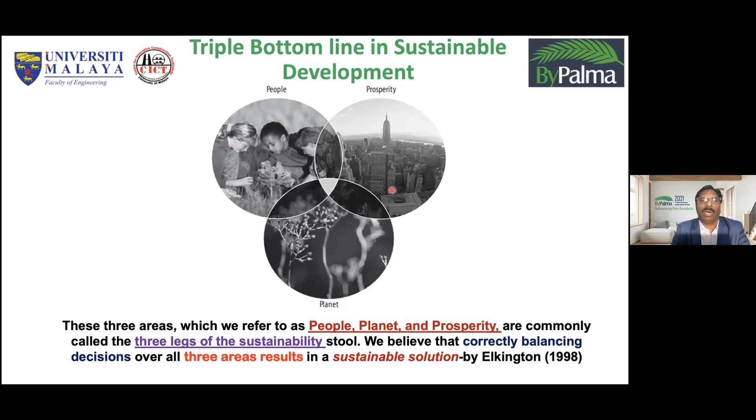But today, sometimes we look into the people but let down the planet, or focus on prosperity, and there will be consequences for the other two. One example: the United States consumes 30% of the total world's energy and 60% of electricity annually, for less than 5% of the world population.

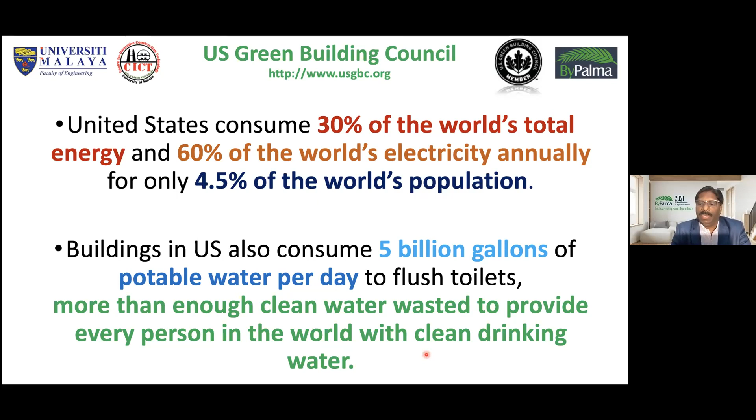Also, look at the water they use every day, potable water, to flush toilets in the US: 5 billion gallons. That water would be enough for every person in the world. I'm from a country, India, where we see many places with water scarcity. So one place has abundance or wastage, another place has difficulty getting basic needs.

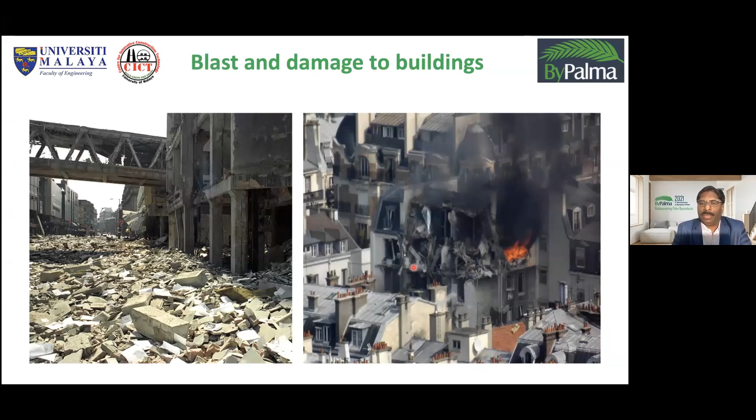Even if you look into the design, according to LEED certification, they normally consider energy saving, water efficiency, CO2 emission reduction, improved indoor environmental quality, and stewardship of resources and sensitivity to their impact. These are the metrics used in building certification for LEED.

If you don't know what LEED is, it's an acronym for Leadership in Energy and Environmental Design. In most Western countries, especially the US and Canada, they use this certification. In Malaysia, they use the Green Building Index.

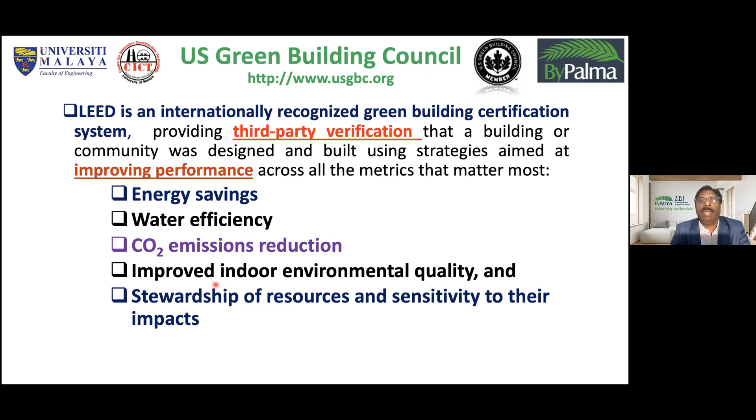So we see there is nothing to do with blast or any blast resistant structure here. Probably in future, they may consider certain structures that are subjected to blast or impact resistance.

Now let me go to the oil palm shell concrete. It's a biodegradable material available plenty in Indonesia, Malaysia, Nigeria, Ecuador, and other tropical countries. We developed this oil palm shell concrete, calling it lightweight because the density is less than 2,000 kilogram per cubic meter. We studied its mechanical and structural behaviors, then went on to test for its blast resistant properties.

In Malaysia, millions of hectares, probably 18% of the land, are under cultivation of palm oil plantation. You can go everywhere and see it. This information is given on the Malaysian Palm Oil Council website, I won't go through it line by line.

They started in 1870, and today it's over 5.9 million hectares, or 18% of the total land as I mentioned. They produce 19 million tons of palm oil plus 2.2 million tons of palm kernel oil.

The oil palm can grow up to 60 feet, with a lifespan of about 100 years or even more. But normally they cultivate it for only 25 to 30 years, then replant it due to domestic, commercial, and economic reasons.

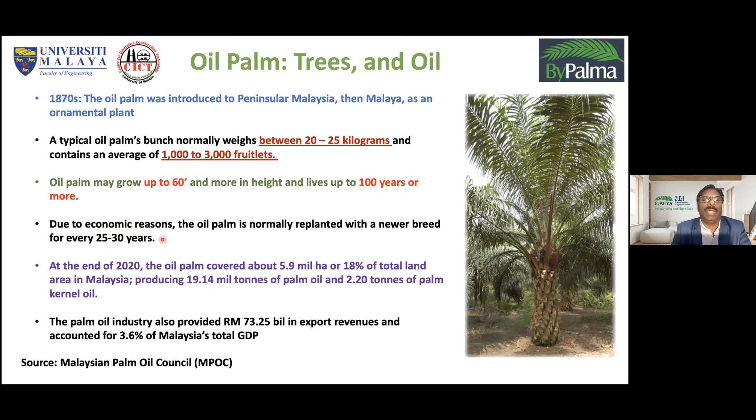Looking into the fruit bunches, after extracting the palm oil, each bunch probably has 1,000 to 3,000 fruitlets and may weigh 20 to 25, say 25 kg per fruit bunch. Each fruit bunch has, say, average 2,000 fruitlets. After extracting, they sterilize first, then extract the palm oil.

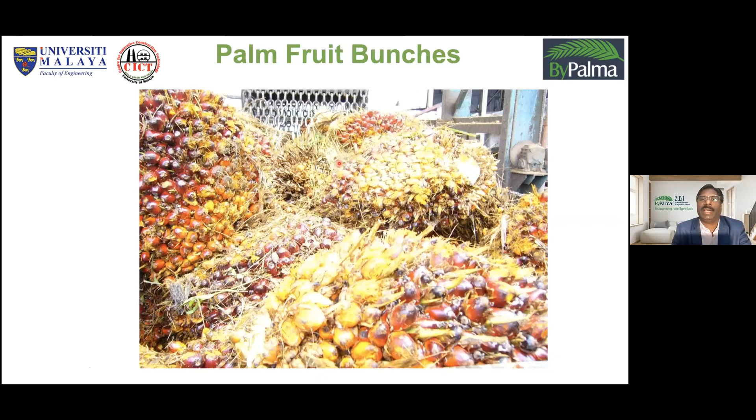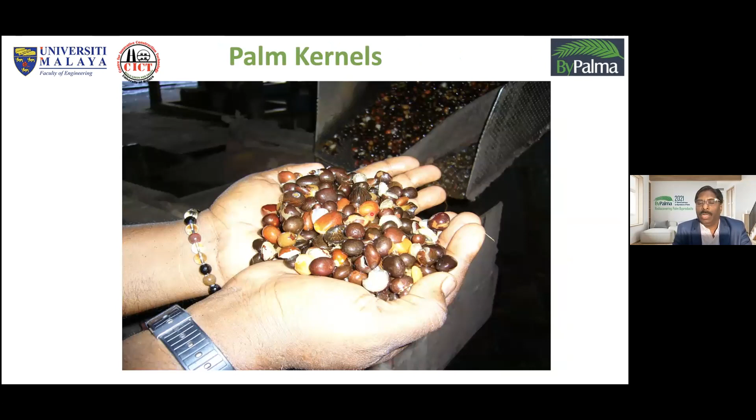This is the squeezing of the fruit. What you see in the palm of the hand is the palm kernel, encompassing the kernel inside. This is the shell here, and this is the kernel. They extract the kernel to get another oil called kernel oil.

So if you see here, it's very easy - most of you know this, but some who come to this meeting may not be aware. This is the kernel.

This is the palm fruit, fleshy, from which they extract the palm oil, cooking oil. And this is the shell we are talking about, called oil palm shell, brownish in color.

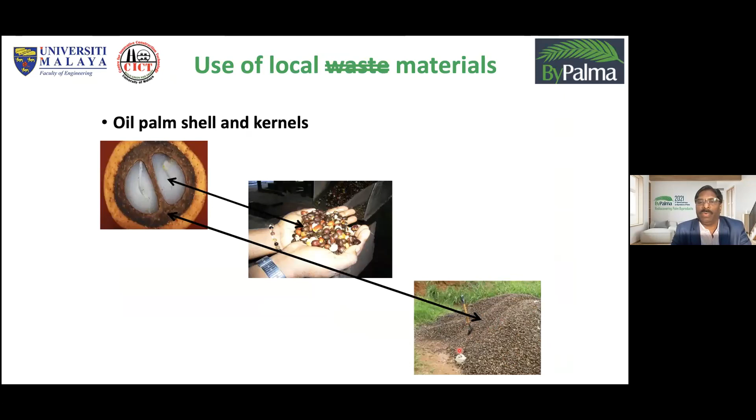Thirty years back, Professor Abang Ali from UPM was the pioneer in Malaysia who started this work. I pay respect to him. He's one of the pioneers, and nobody did this work except him in the beginning, in the 1980s. So when he started, it was considered novel. Afterwards, many including me and my students took up this work on oil palm shell.

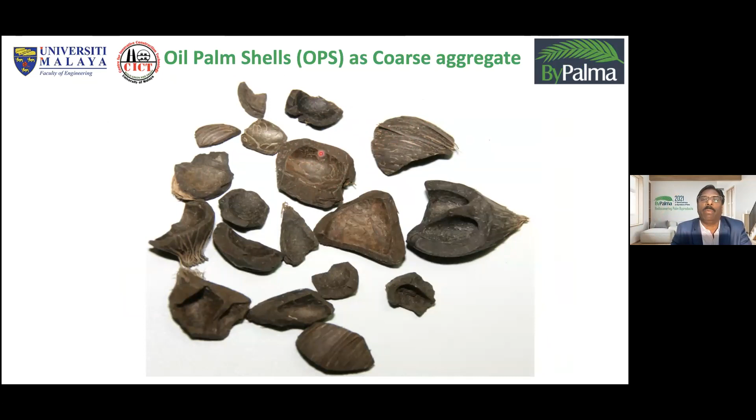So we have gone ahead to do something on blast resistance capacity. If you look here, we see that the shells have different shapes, convex, concave, and broken surfaces, and their thickness varies depending on the species.

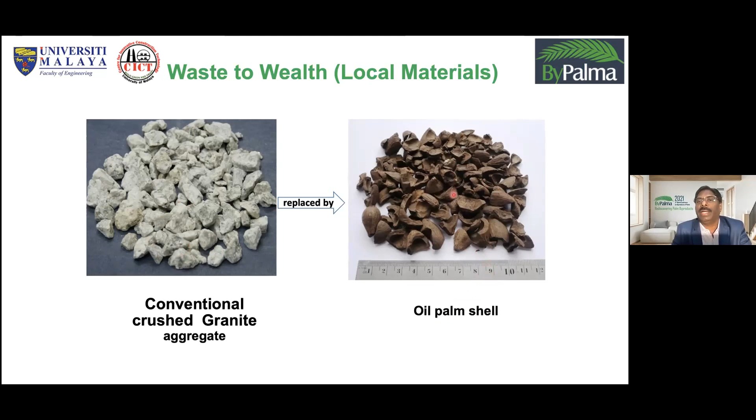We tried two types of concrete. One is the conventional crushed granite aggregate concrete, and the other is the oil palm shell concrete. So two types of concrete we cast using these two materials, and you see that they are quite contrasting.

If you look at the density, it's 1,500, here less than half of the crushed granite. And the thickness, we can get crushed granite at any desired size, probably 20 or 40 mm, whereas here the thickness is 0.7 to 3 mm, but the sizes can vary up to 12 or 14 mm from 5 mm onwards. The specific gravity is half of the conventional crushed granite, and the fineness modulus is more or less similar.

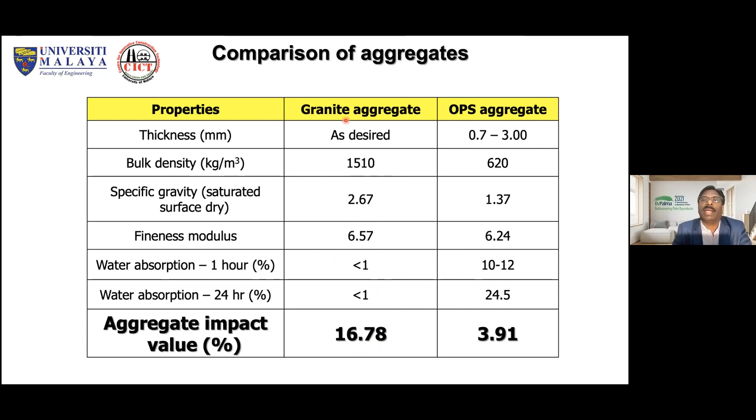Whereas the water absorption is 24% here, and the aggregate impact value is almost 4 times that of normal crushed granite - this has 1/4 of that value. That is what enabled us to investigate its impact resistance.

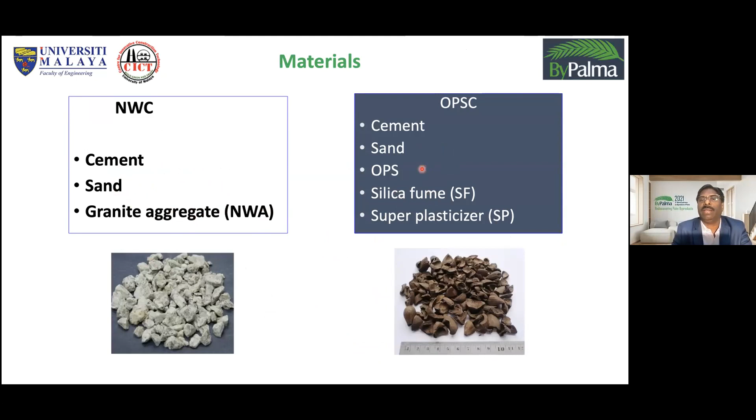So we did an impact test. I'm not showing much here because of time constraints. We did this concrete, two types of concrete. Here, the only addition was silica fume - we wanted to add the silica fume, I'll tell the reason later on.

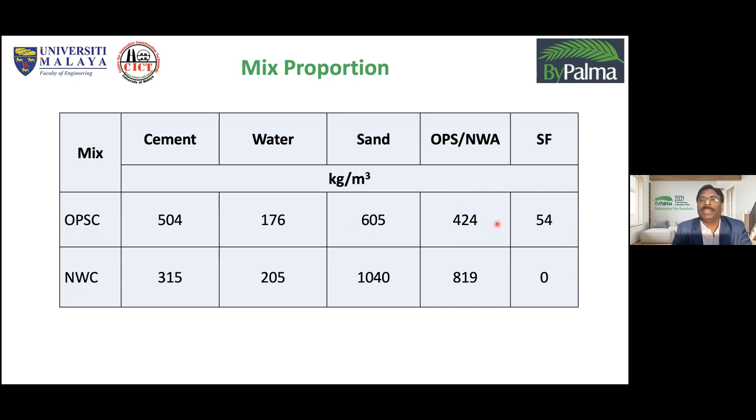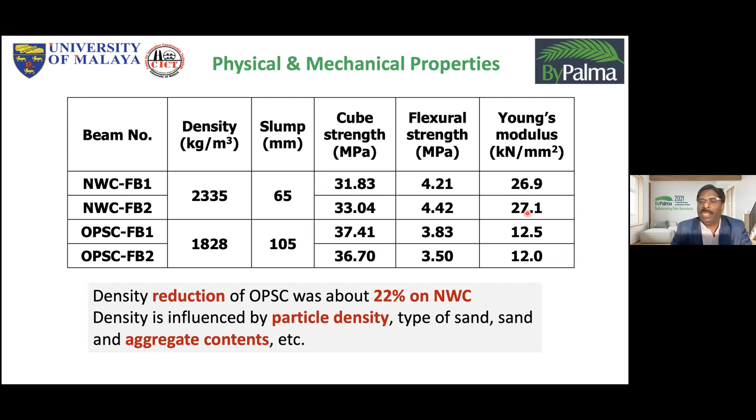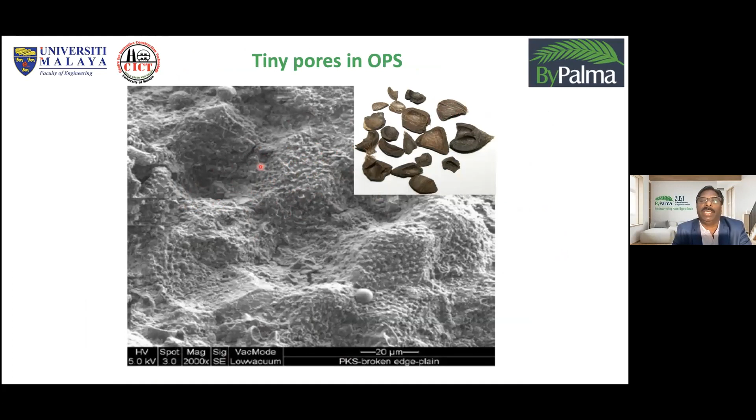This has something to do with the strength, as I mentioned and already shown - there are tiny pores, millions of them, on the surface, and undulations you can see from the micro SEM, with 20 to 30 micrometer size tiny pores.

When we used only cement, it did not get filled up - only cement particles remained. So we knew the bond between the matrix and the aggregate was affected. This is the oil palm shell, and this is the convex surface - millions of tiny pores that are not filled with the cement matrix. So the bonding is not that good.

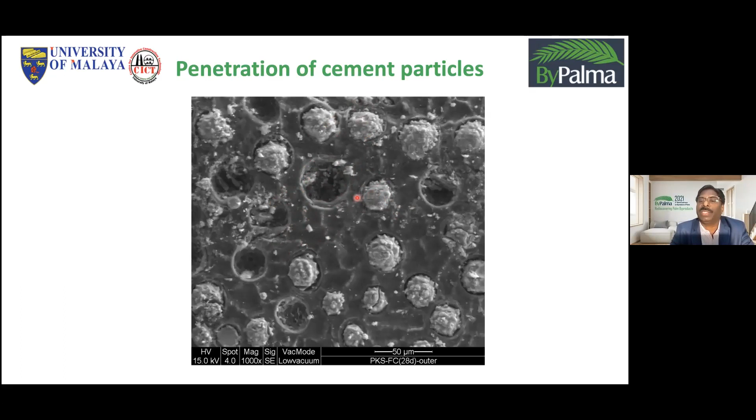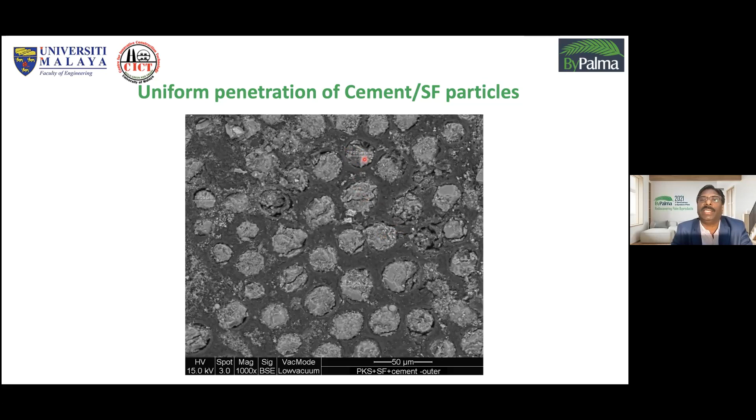So what we did was add silica fume particles with the cement, at 10%. We found that after adding this silica fume, which is 100 times finer than cement, it could fill most of these tiny pores - here 20 micrometers, here 27 micrometers, and so on.

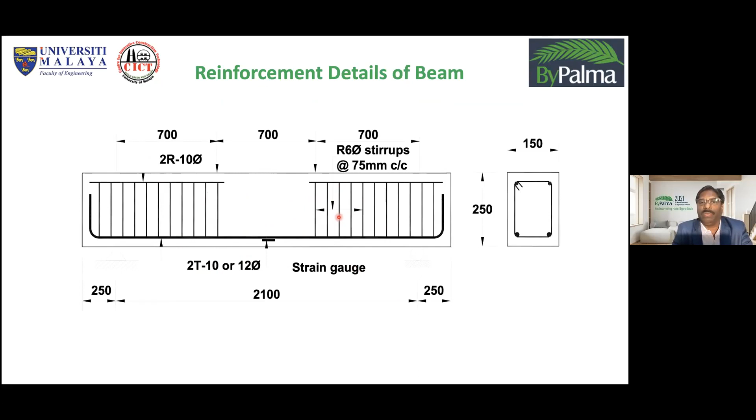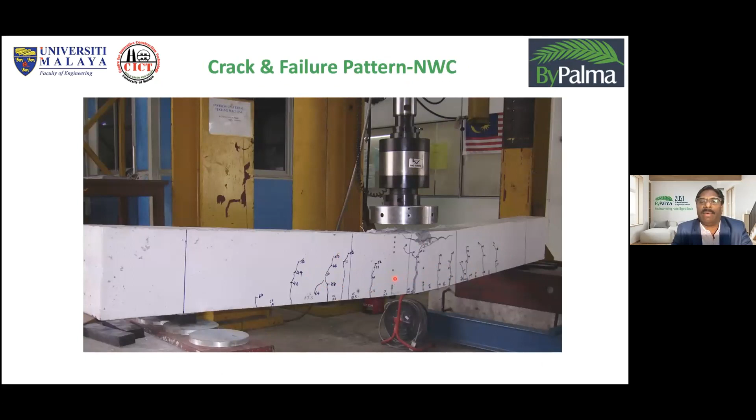Later on, we went on to do beam casting, so we did a beam test - this is the structural behavior. We did quite a lot of tests, and noticed that normal weight concrete does not have many cracks, because after certain cracks, the cracks widen up. Whereas the lightweight oil palm shell concrete shows double the number of cracks.

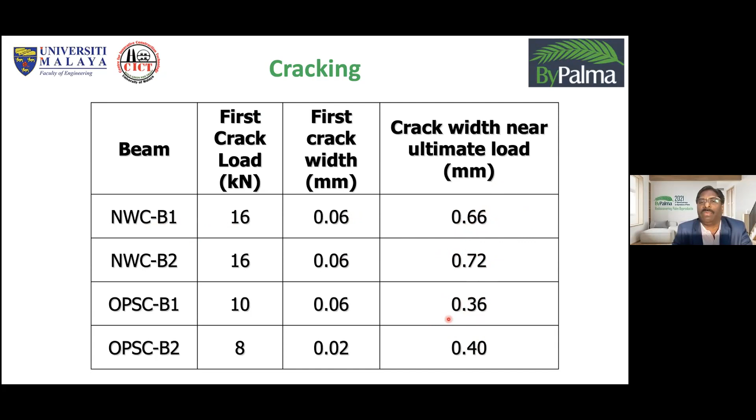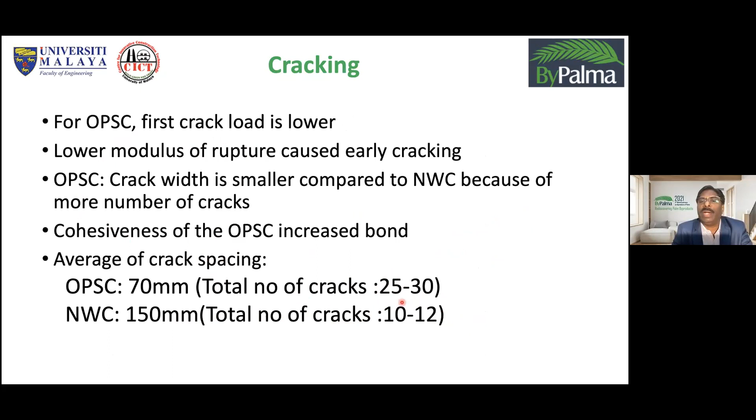This enabled us to see that the normal weight concrete's maximum cracked ultimate load is 0.66, here it's roughly half of that. The first crack width is more or less similar. What we understood is the total number of cracks in normal weight concrete is only 10 to 12, whereas here it is 2 to 3 times higher. That means more cracks, but less crack width.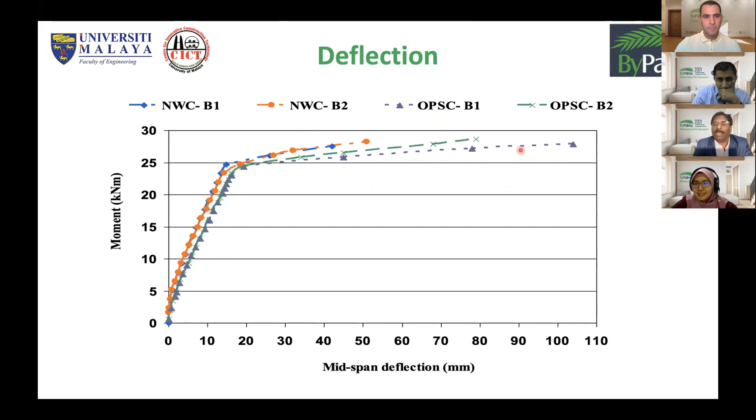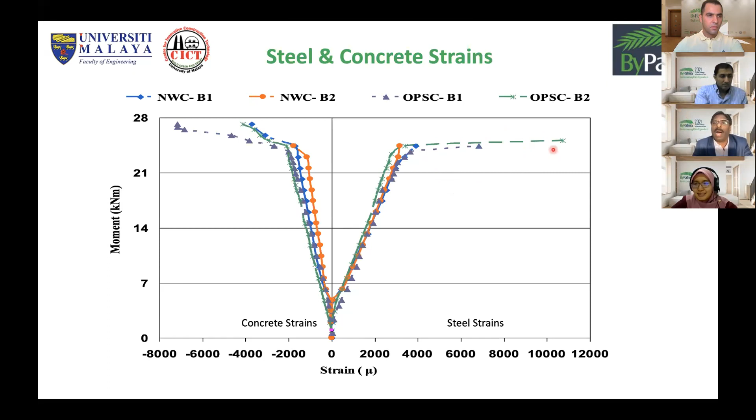Because of the ductility, it can give more warning to the inhabitants, meaning it will not collapse drastically like normal weight concrete. It will give enough warning, and will not have what we call a brittle failure, rather a ductile failure. We see the strains in the steel bar reach almost 12,000 micro strain compared to 3,000 micro strain in the normal weight concrete beam.

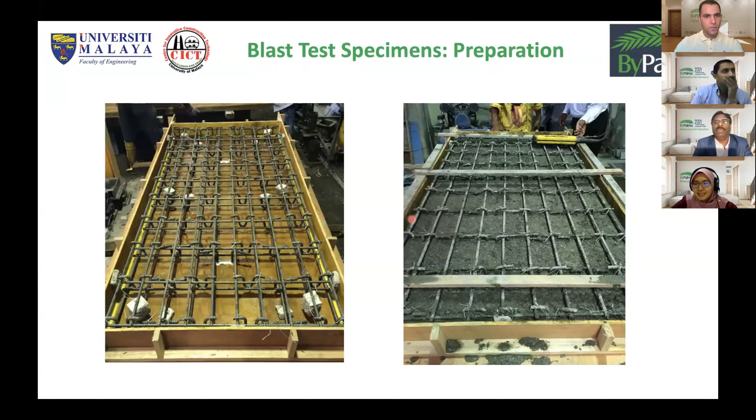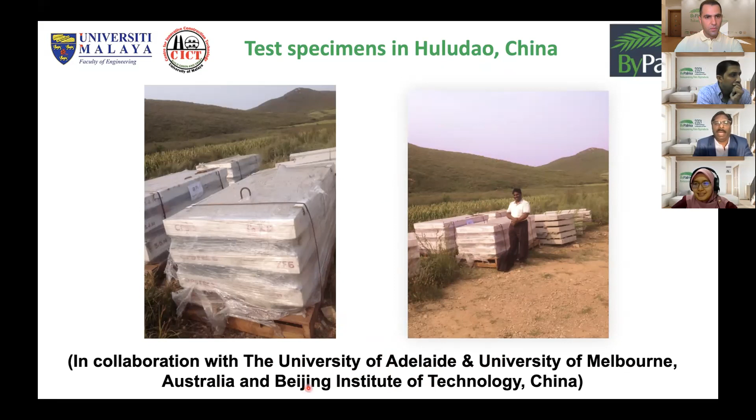So I'm moving to the last part of my presentation, on blast and impact resistance. After investigating the structural behavior, we went on to do the blast resistance testing. We cast the slabs with appropriate reinforcement, poured the concrete normal way, then packed the slabs to send to Huludao in China with help from our University of Adelaide in Australia, and Melbourne. They helped us do the test in Huludao, China, with the Beijing Institute of Technology, who handled the blasts. This is the arrangement with the standoff distance.

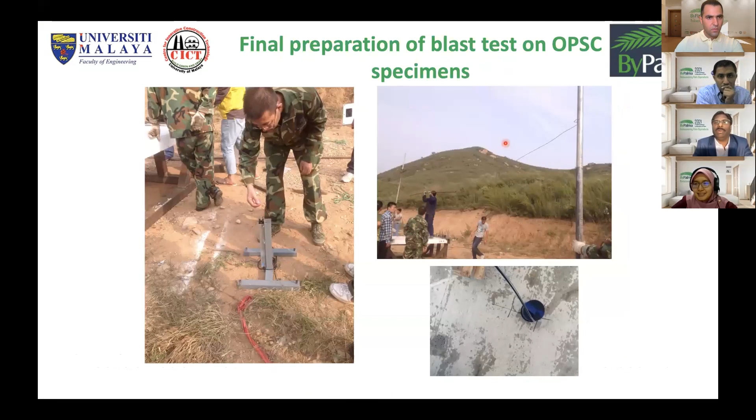Here we can see the standoff distance is only 1.5 meters. This is the slab. For the first slab we used 1 kg TNT charge weight, afterwards we used the same slab with 10 kg TNT. Then another slab we used directly 5 kg TNT - this is the standard they use for blast testing. So the standoff distance is 1.5 meters, and we used the same slab with two charge weights, while another slab used 5 kg TNT. This is what we call the scaled distance, which is the standoff distance divided by the cubic root of the charge weight.

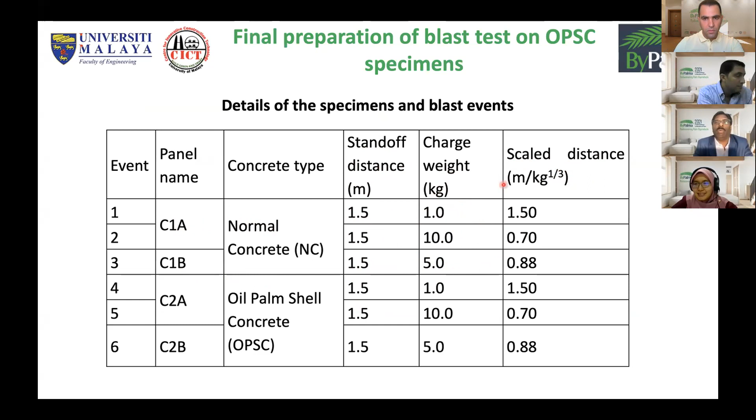So this is the different setup of the testing. After the test, what we noticed is when the charge was ignited, there is a fire, there's a pressure, there's an impact. You see the difference between the normal weight concrete and the lightweight OPS concrete - the normal weight concrete completely shattered. We can see the steel bar, and we can't go near because these shrapnels can kill people. During the blast, there is a fire, there is a pressure, there's an impact.

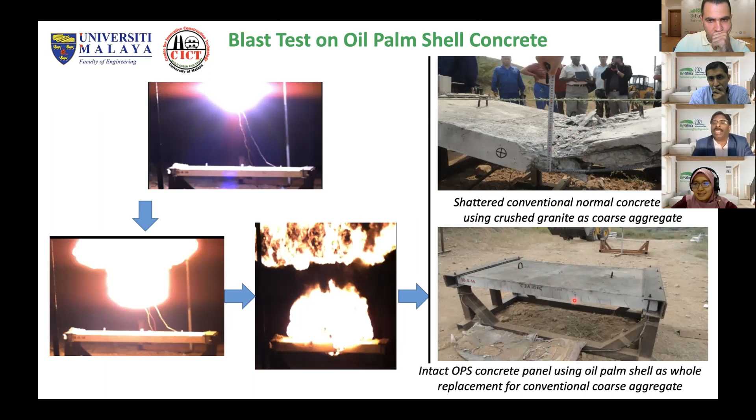So why do people get killed? Not just from the blast itself - one of the consequences is the shrapnel that is created, maybe glass or concrete pieces that are thrown out and hit people. Look at this one - after the same 10 kg TNT, it was intact. There are a lot of cracks, but it was intact. Why? Because of the fibrous nature of the oil palm shell, it could absorb the impact, and it could withstand the blast.

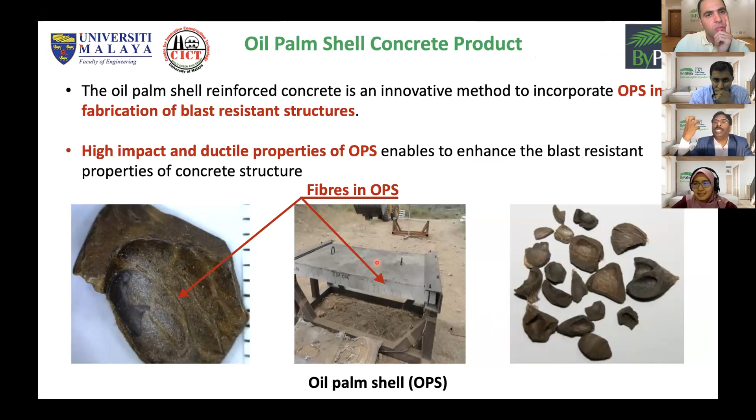Okay, so maybe I can just show this video for you - 2 minutes, I will finish on time.

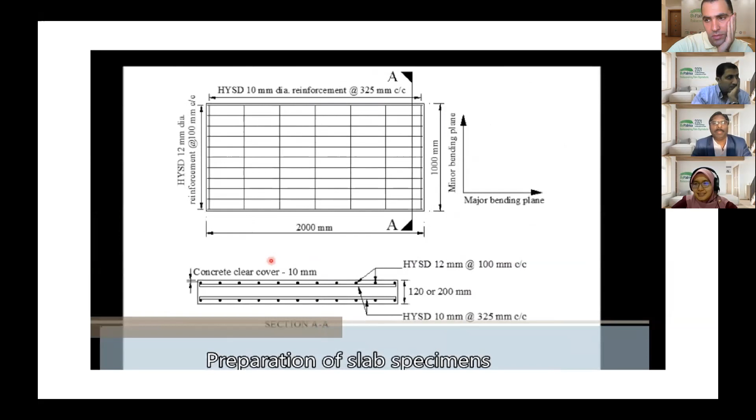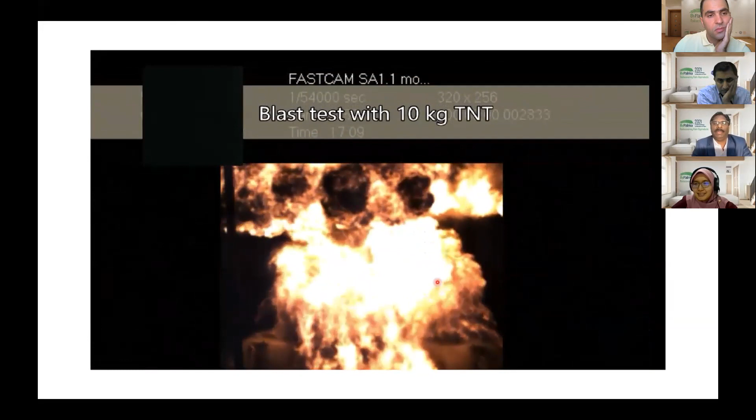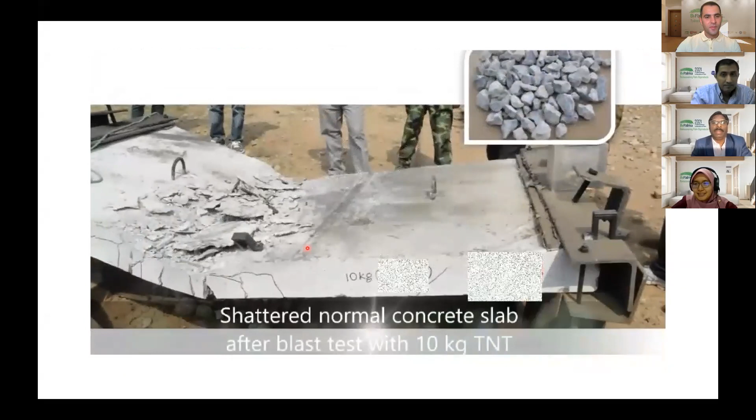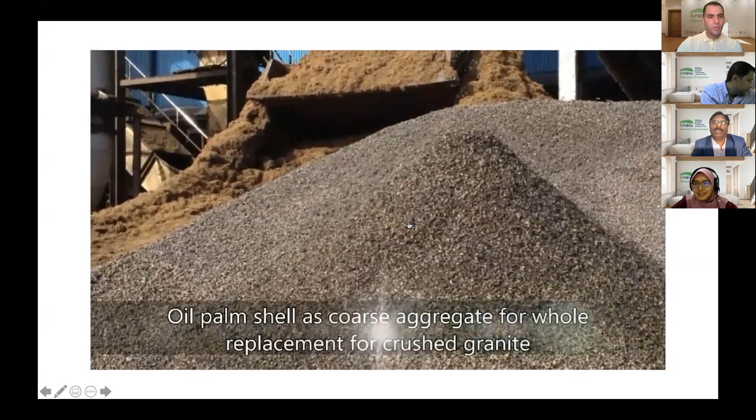This is the blast, impact, and the fire, 10 kg TNT. This is the effect of the blast - you can see the reinforcements. This is the impact. Maybe I did not share the sound, but you can see the video, and you see the complete shattering of the slab. But now we see the oil palm shell concrete - you see that there are multiple cracks at the base, but it did not get shattered. The same 10 kg TNT, so you can see that.

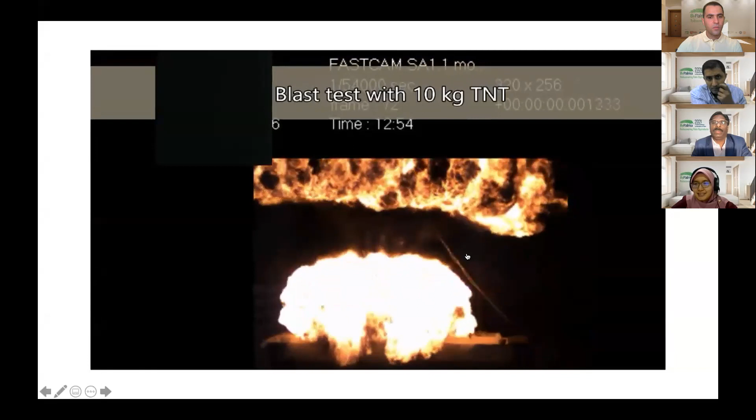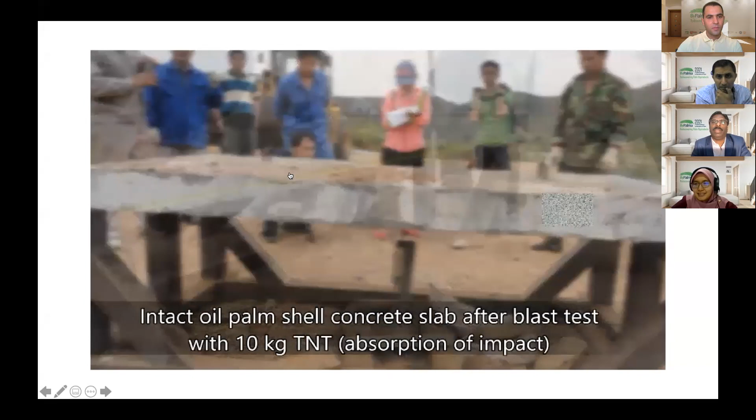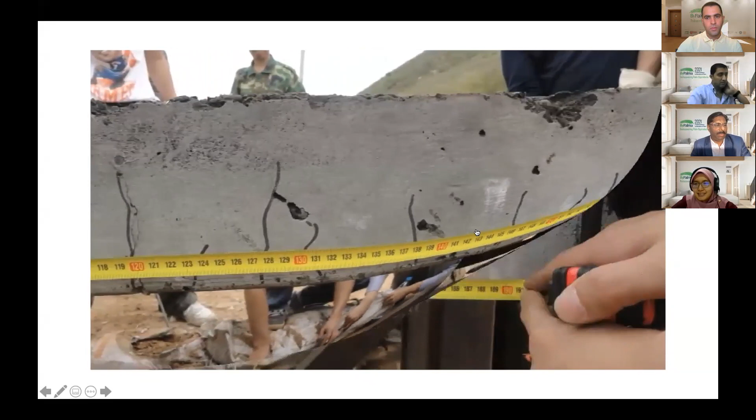So there are numerous cracks, however the slab was intact - we can see that the slab was intact, after the 10 kg TNT. There was no crack, there were no wider cracks, there was no shrapnel.

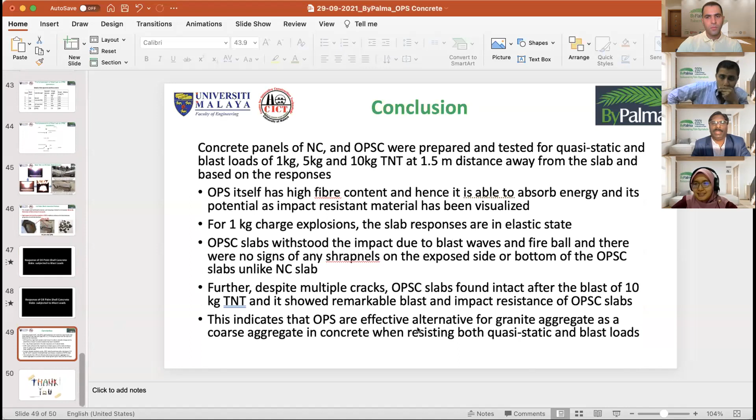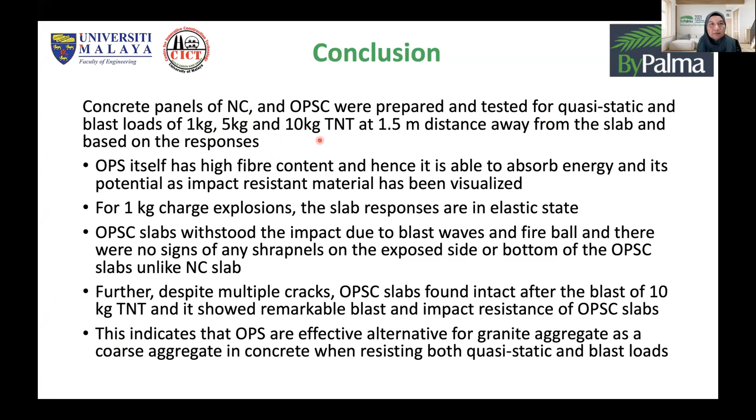Okay, that's about the slabs, and now to conclude my presentation since I'm on time - I hope there is enough time for others. Normal concrete panels with normal weight concrete and oil palm shell concrete were prepared and tested using quasi-static as well as blast loads. We used 1 kg, 5 kg, and 10 kg TNT with a standoff distance of 1.5 meters from the slab. OPS has a fibrous content, so it was able to absorb the energy.

It has the potential as an impact-resistant material. I think this is quite an important finding in this research - this is the first time, I believe, in the whole world that there is research on the effect of oil palm shell showing it can absorb energy, absorb impact, and absorb blast.

So with 1 kg TNT, the slab was behaving elastically. Even for the OPSC slab, it withstood the impact due to the blast waves and the fireball, and there was no sign of any shrapnel, unlike the normal weight concrete slab. Further, despite multiple cracks, the OPSC slab was found to be intact even after the 10 kg TNT. It shows a remarkable blast and impact resistance.

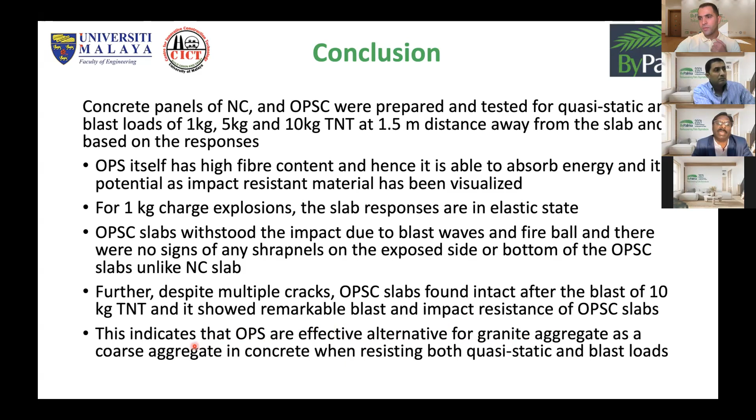This indicates that oil palm shells are an effective alternative to granite or other coarse aggregates when resisting blast load. With that, I say thank you, and if there are any questions, I can explain. Okay, thank you very much.